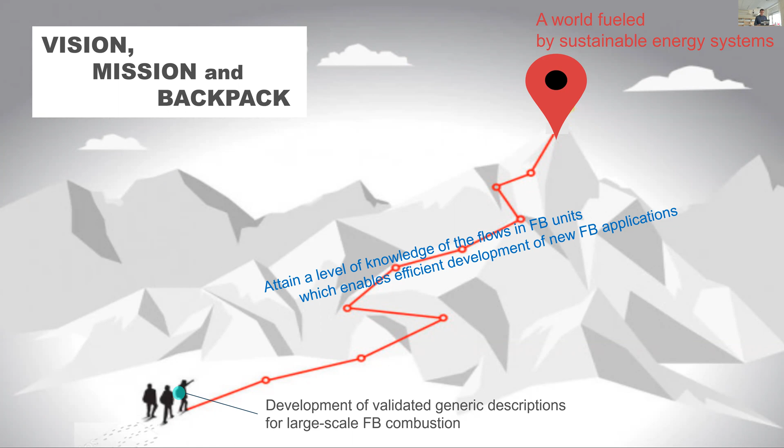So the lecture is divided into three sections. I'll first talk about the insides of fluidized beds, the physics inside the reactors and some key aspects—a bit of a crash course into fluidized bed reactors. The second section is the outsides, where these reactors can be put into different processes, how they interact, what's their role in those different processes, and what are the key question marks. Finally, I will have a section discussing the mining of new knowledge: how do we develop knowledge, how do we attain new knowledge in the field of fluidized bed technology?

So let's go with the beginning, the inside of fluidized beds. As I said, this is a crash course—the ABC of fluidized bed technology. Their function is primarily to allow gas-solid chemical reactions. Here the orthodox people will say, yes, but there are gas-solid-liquid fluidized beds. Yes, there are. And there are beds which are not intended for chemical reactions but for physical processes like dryers, heat exchangers. Yes, they are. But I would claim most of those applications are for gas-solid chemical reactions. So there are key aspects, I will walk you through these three. And finally we'll look at the two main types of fluidized beds. Yes, I will offer you some, if this allows, of course, which maybe it does not.

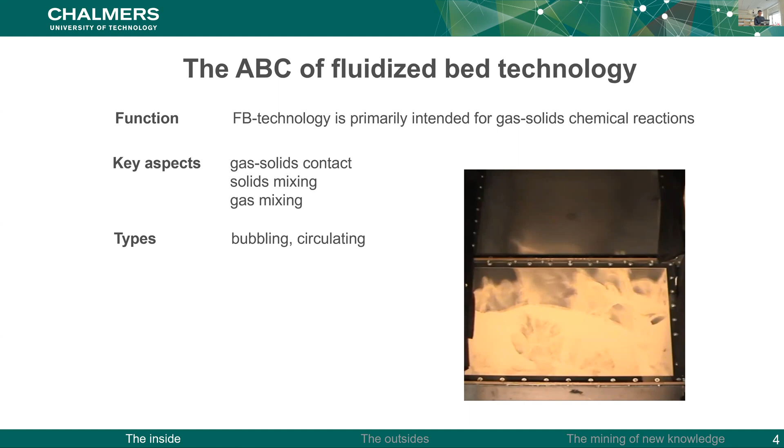No, I was thinking of sharing some video with you, but it was not possible at this time.

Let's continue. First key aspect: the gas-solids contact. One thing to keep in mind is that the gas flow is divided into several phases, and at any given time, only a tiny share of the gas is in contact with the solids.

We did a study on this, combining experiments, digital image analysis, and CFD modeling to see the streamlines of this gas. We could see how much time they spend in the emulsion with the solids, how much time in the bubbles, and so on, and extract statistics and conclusions.

We found that a good way to describe it is to say the gas goes into three phases: the emulsion phase, the bubbles, and some short-cutting jets. Sometimes the bed opens itself totally, and the gas will leave without any contact with the solids. Only the gas in the emulsion will have the chance to be in contact, depending on the mass transfer.

So all in all, the share of gas that comes into contact with the solid surface depends on a lot of parameters and on these exchanges between phases. It's a quite complex question that we have looked at and will continue to look at, but there is still a question mark on how to describe this efficiently.

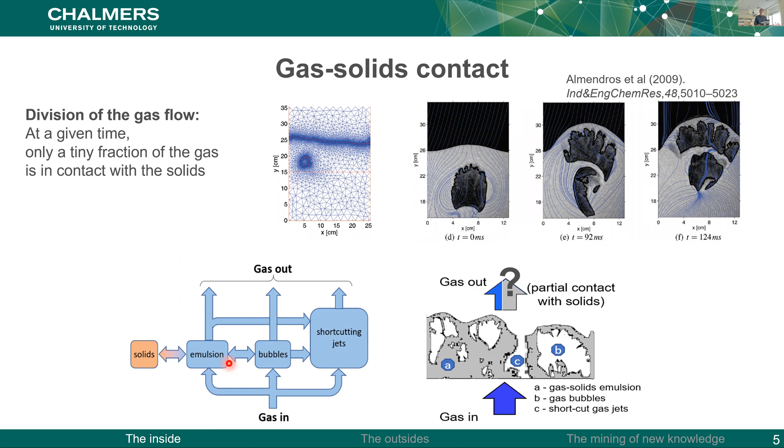Another aspect is solids mixing, compared to, for example, PC boilers or burners, where you force the reactants to meet at a certain location or enter the reactor at a certain location. Here we have the solids typically point-fed from the side of the reactor, while the gas is distributed feeding from the bottom.

So there is a challenge here in making them meet. The lateral spreading has to be fast enough to ensure good contact between gas and solids. We have been studying this too.

We can see, for example, this is from... now you will excuse me, I will fix this once and for all. Yeah, now it should work.

This is the Chalmers gasifier from the roof. We throw in some phosphorescent fuel particles and turn down the light, then do digital image analysis. This is what the lateral spreading looks like.

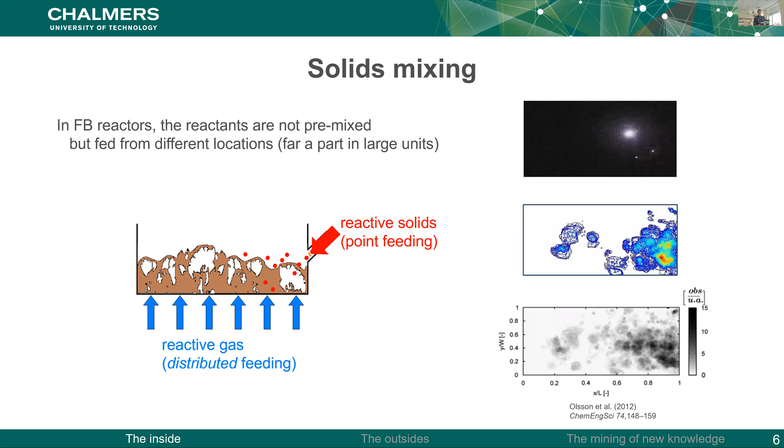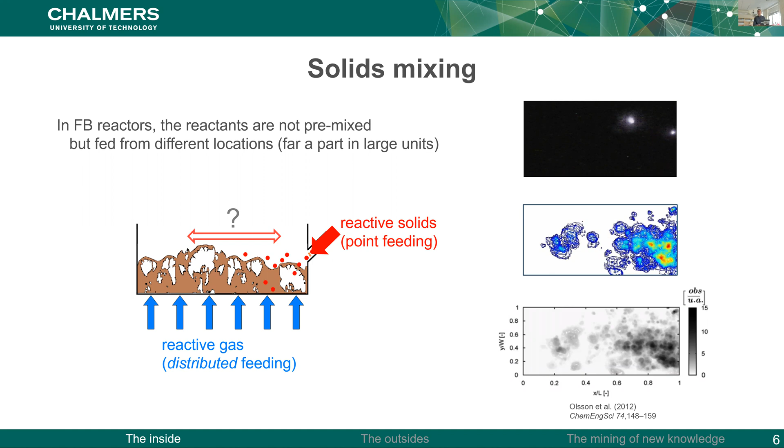As you see, there is a lot of concentration here, but on the other side there is some lack. That's the challenge we need to meet. From this we can get statistics, but we still want generic descriptions of this. This is for a specific unit at specific conditions with specific solids, and our goal is to have generic descriptions. So again, a question mark here.

Another one is gas mixing. Sometimes the gas we inject needs to react with the solids, but also with some gas that is internally produced in the reactor.

An example of this is the volatiles generated in solid fuel combustion. We have this video from Twente, and these flames you see mean that the injected air is meeting the volatiles released by the fuel particles, producing these flames.

Apparently one would say this is good, there is good contact because we see a lot of flames. But those who are alert can see, once in a while, dark smoke coming up also, which indicates that maybe the whole picture is not that perfect.

There are measurements from the Chalmers boiler here. Measuring the fluctuations between reducing and oxidizing conditions, we still see quite a presence of volatiles, and this volatile concentration decreases with height. But we see a fluctuation in the gas concentration, telling us there is also non-perfect mixing of the gas in the time domain.

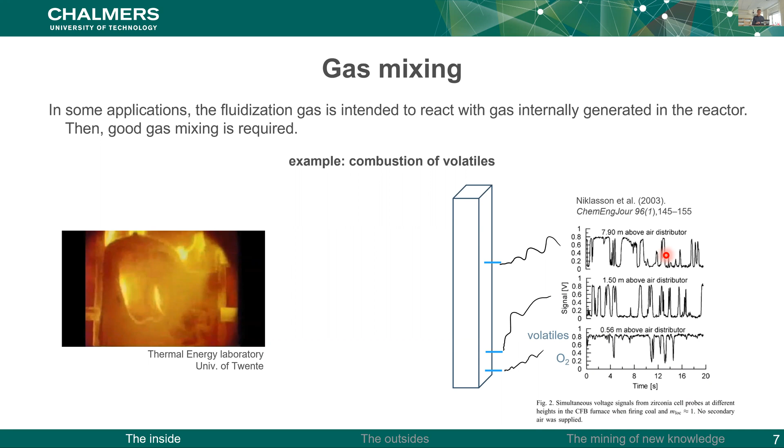Finally, another important property of fluidized beds is thermal inertia. Here's an example: if we have a tube reactor with oxygen and at some point inject hydrogen, we will have combustion and a release of heat, which will increase the temperature.

If we cool it down, the temperature decreases. If we extract the same heat that was released, it goes back to the same temperature. Now the question is what happens when we have solids in this picture, injecting not only oxygen but also a flow of solid particles, which carry much more mass than the oxygen.

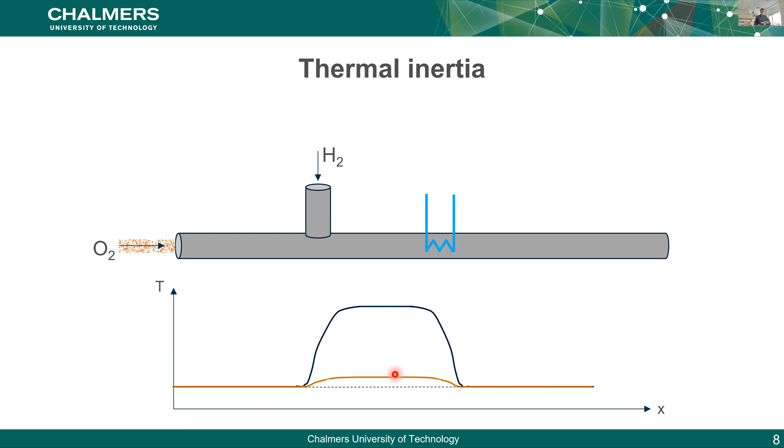This creates a thermal inertia that dampens both the temperature increase and decrease. This is a known property of fluidized beds, where there is a lot of solids mixing and solids flow, so you have rather homogeneous temperature fields.

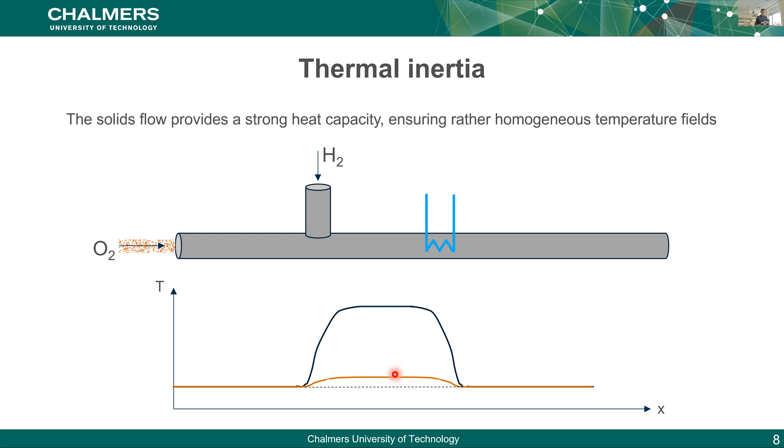Finally, we come to the different types of fluidized bed units. If we start with the bubbling case, which is the typical one, we have a certain cross-section, and if we want to increase the capacity of our reactor, we do that by increasing the cross-section. We keep the same velocity, so with increased gas flow we need to increase the cross-section, and we grow until a certain critical size. This size becomes critical because of cost, performance, mixing, and so on.

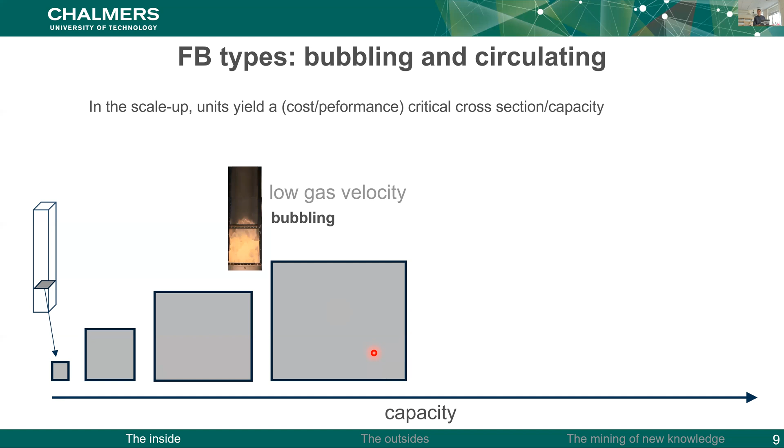At this point, if we want to continue increasing capacity and put more gas flow in, but we cannot increase the cross-section further, then we go down in size. Going down but increasing the gas flow makes the solids start to circulate—the gas flow is high enough to start dragging up the solids. This means we need a system to recirculate them, and here we have the circulating fluidized bed.

If we then keep scaling up, we again come to larger sizes, of course. But this is the main background to why we have these two different types of units.

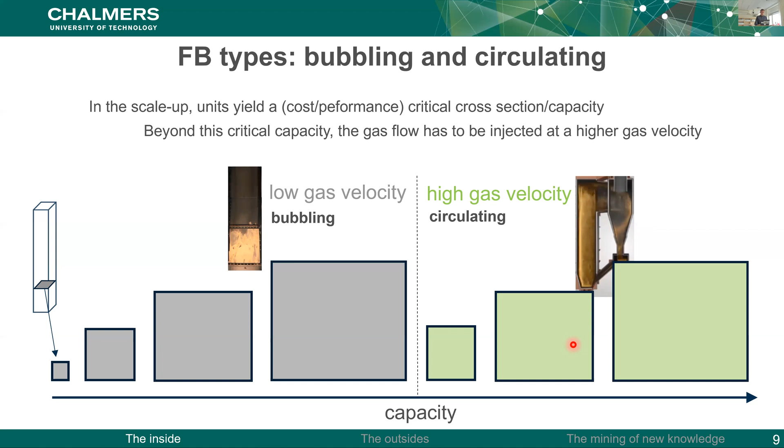Finally, this was the first section. We have gone through the key fluidized bed fundamentals and the types of fluidized bed technology. And now I can give you this hypnotic video that you could look at for ages, I guess.

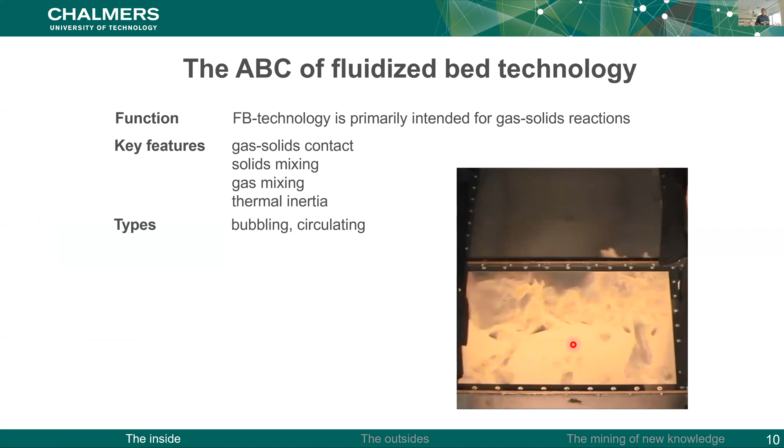This was, as I said, the first section. Now we move on to the second one, the outsides. I will begin this section by giving a bit of historical perspective.

The whole story starts 100 years ago in Germany, with the Winkler gasifier—there is a patent on that, for gasification. Gasification has been in the picture quite a lot the whole time. This is a very beneficial technology especially during embargoes and wars, when you don't have access to oil or gas—then you can produce it by gasification from solid fuels. So it has been there the whole time.

In 1937, Exxon invented the cracking process for crude oil, and since then we have had a lot of fluidized beds dedicated to this. This was the time of oil. But in the 70s came the two oil crises, and then fluidized beds turned their eyes towards coal combustion.

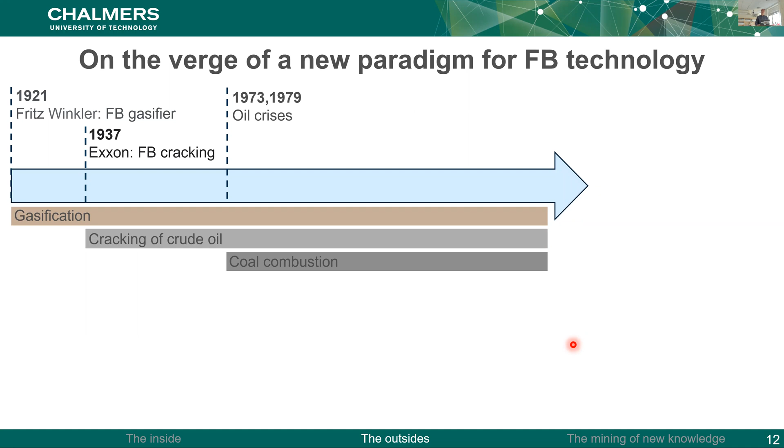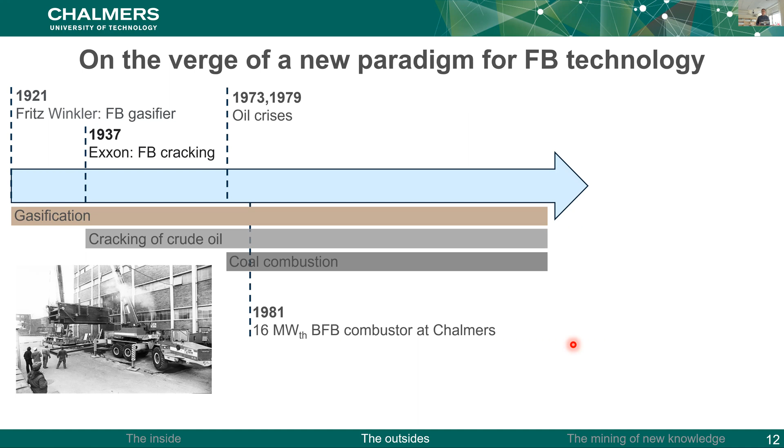At this very same time, in '81, we had our 16 megawatt BFB bubbling combustor at Chalmers installed—you can see the picture here. And in '89, we had a circulating fluidized bed installed, 12 megawatt. This unit has given a lot of joy, publications, data, and knowledge to the fluidized bed community.

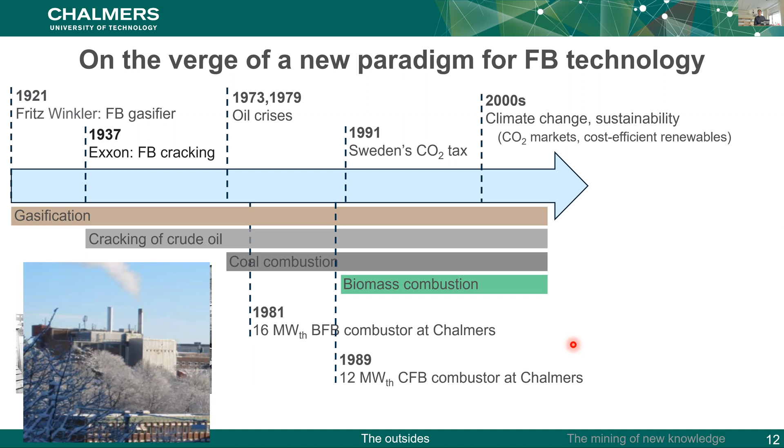In '91, we got the CO2 tax in Sweden, to combat the pollutant effects of coal, and since then we have seen a large increase in biomass combustion in fluidized beds. What we have now in this millennium is the awareness for climate change and sustainability, which has opened CO2 markets and cost-efficient renewables. And in 2007, in this new period, we had at Chalmers this 4 megawatt indirect gasifier.

What I see in the future is that some of these technologies will still be there, but we need new fluidized bed technologies that tackle carbon capture and storage, more complex bioenergy conversion, energy storage, pollution generation, and recycling.

Maybe I would say one of the most important highlights in the story of fluidization was in '98. There was this master thesis student coming to Chalmers, and he did a master thesis that still the world hasn't witnessed anything like that again.

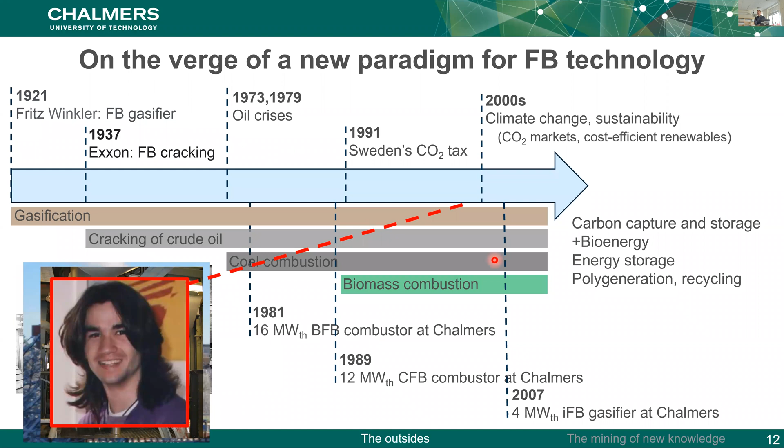I would like to focus here again: most of fluidized bed use in the energy field has been in combustion. I want to show you these statistics, from the IEA report. What we see is a clear stagnation of fluidized beds.

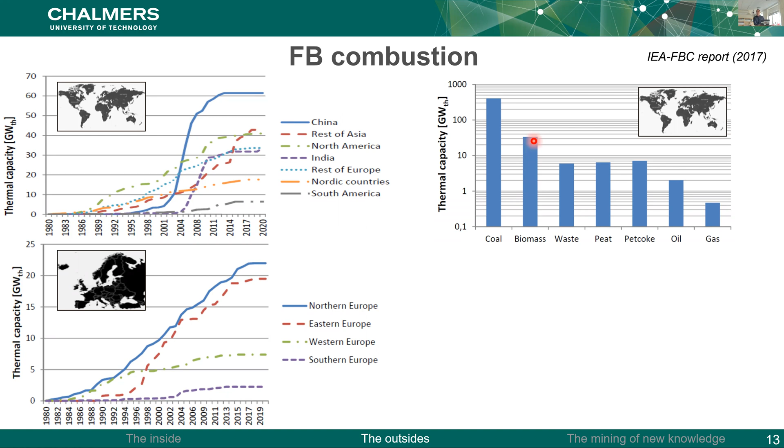And then after that, we have biomass. This is quite tricky, because this is a logarithmic scale on the y-axis, so here the factor is more than 10. We have 30 thermal gigawatts for biomass and about 400 for coal.

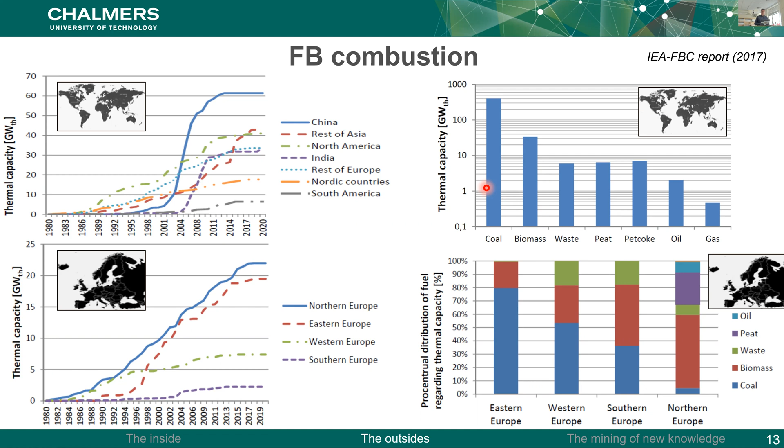If we compare this to Europe, these are global numbers, but we see big contrasts there too. In Northern Europe, most of it is renewable fuel, just a few percent anecdotic coal. But in Eastern Europe, it's 80% coal. So if you run the numbers, it's actually Canada, some of the US, and Northern Europe that stand for this biomass use mainly. The rest of the world, fluidized bed is basically a synonym with coal, and this is something you notice at conferences, which is an interesting point to keep in mind.

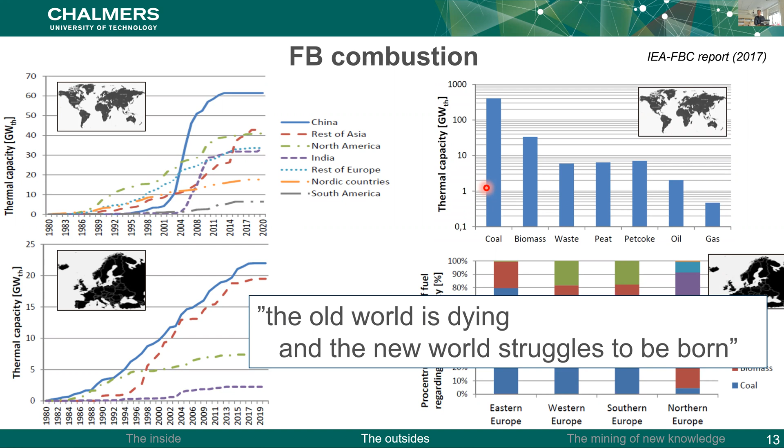I think of one of the great philosophers of last century, whose quote reads that the old world is dying and the new world struggles to be born. I think we are there somewhere. The old world is clearly maybe not dying, but at least saturating or starting to slow. But the new world is on the way, and you can see that at conferences too, where more and more paper contributions, more and more research, is devoted to these new fluidized bed technologies.

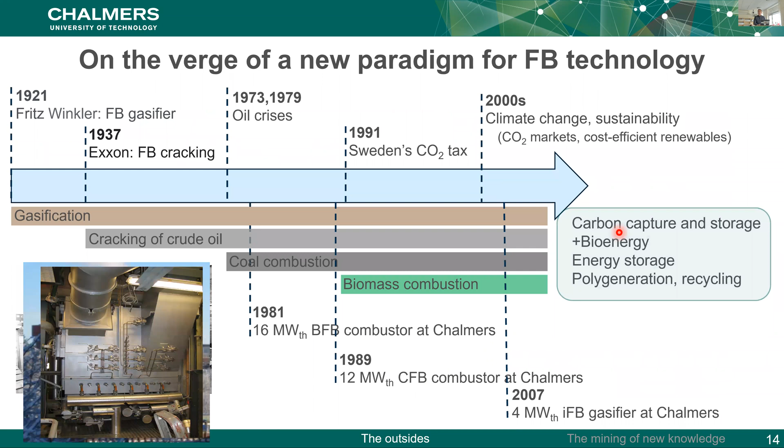So we will have a look at those. The first is thermal decomposition, which I wanted to talk about just very shortly. What we have is thermal decomposition of some feedstock, typically solid feedstock. This is endothermic, it needs heat, and this heat is provided by a flow of solids.

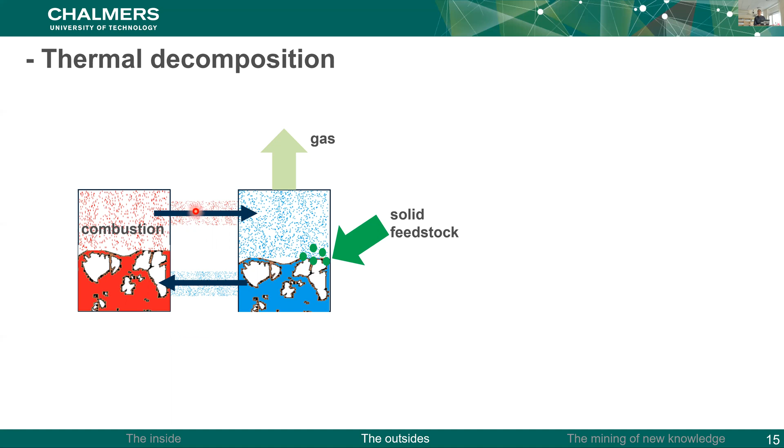Experience in this - well at Chalmers we have the fluidized bed gasifier. We've also been working now in a project together with BioShare, on a retrofit of a bubbling bed, this time not a circulating one, in Karlstad. This demonstration plant will be built next summer.

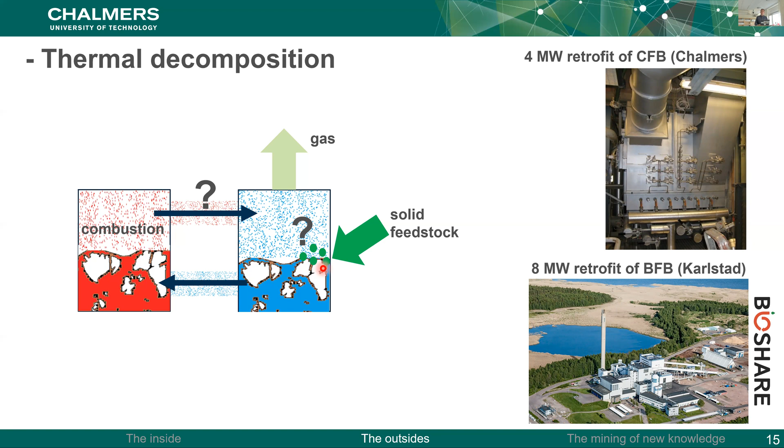Question marks here, yes. How can we ensure a high enough circulation so that it can sustain these reactions? And how will this feedstock behave inside of it - how will it mix? Because depending on how it mixes, it will experience different heat and mass transfer rates.

The second type of technologies are carbon capture. We have oxyfuel, where you feed pure oxygen, and then you have a stream which after condensation gives you the CO2 capture directly. Since you inject pure oxygen, for the same capacity you should have a much smaller reactor, but still with the same power. This means you don't have enough area to extract the heat, so you do this from the circulating flow.

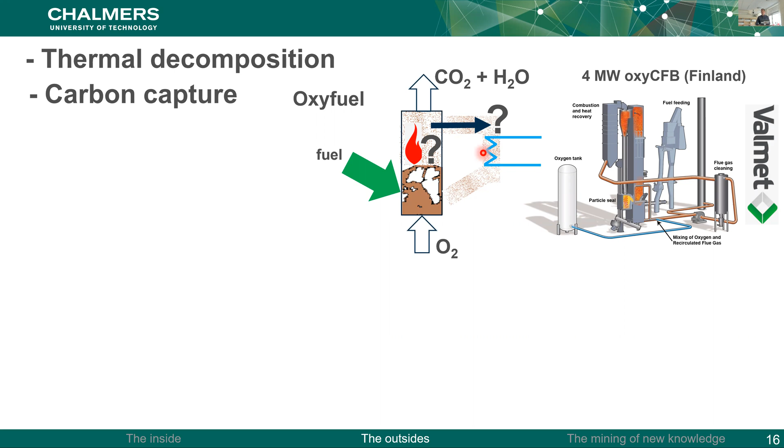This is a technology we studied with Valmet, this 4 megawatt unit, and this is the largest unit with published data on this process in literature for fluidized bed. Question marks here, yes, of course. How will combustion be affected by these high oxygen concentrations and this CO2 atmosphere? And again, can we ensure this high circulation of solids?

The other one is called second generation carbon capture, that's chemical looping. The principle is very, very fast: you circulate a metal, which captures oxygen from one reactor, the exothermic one, and brings this oxygen and heat to the other reactor, in which you gasify and combust your fuel.

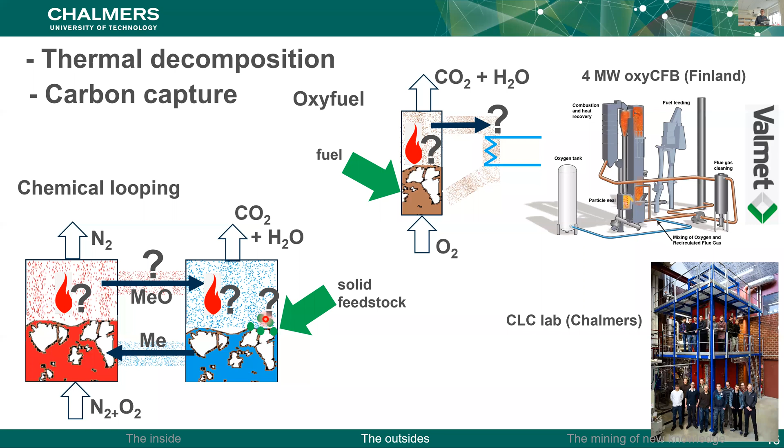Chalmers is a leader in this field - I think there is no doubt about that, in terms of running hours, number of papers, and so on. So I would say Chalmers has the lead in this field. And there are lots of question marks: can we ensure such good circulation as is required? What is the solids-gas contact in both reactors? How will the fuel mix, and so on? So again, lots of questions, and many times the same questions across the different applications.

Finally, I wanted to give a short insight into the energy storage field. Here what we see is a process with intermittent input of energy - this can be concentrated solar power, or this can be valley price electricity. What we do is have a gas-solid reaction, which is endothermic, sustained by this energy input. Once this has occurred, we have these loaded solids at a high energy level, and we can store them at ambient temperature and transport them for their use, so that they can discharge and again produce energy, even electricity, because this releases at a very high temperature whenever we need it.

So we've been looking at this also. Again, many questions.

Is the solids mixing good enough at large scale to ensure that they can welcome, so to say, all this heat? How is the gas-solids contact is another big question, but new questions particular to these applications is the transient aspect. Here we have intermittent inputs and outputs with strong variations with time. How will a fluidized bed reactor or system deal with this? And of course, the cost.

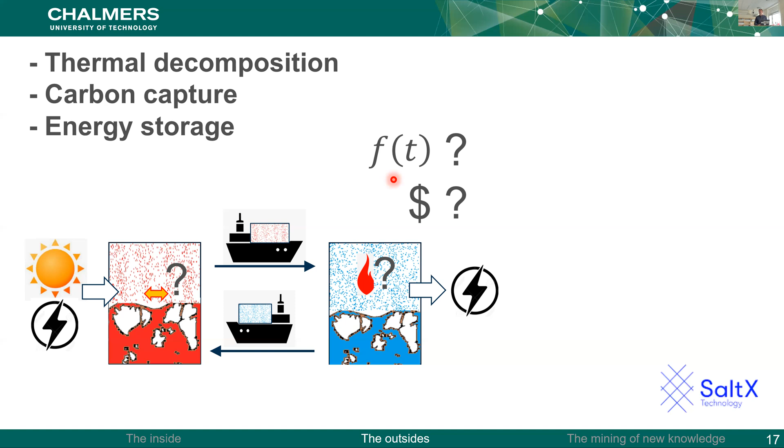There is not much in literature about this. So we did some study looking at the break-even electricity selling price for different sizes and then different assumptions on what would be the carbon capture income, because you can combine this with carbon capture if you do this with calcium looping, for example. We are collaborating in this with SaltX company, a Swedish company.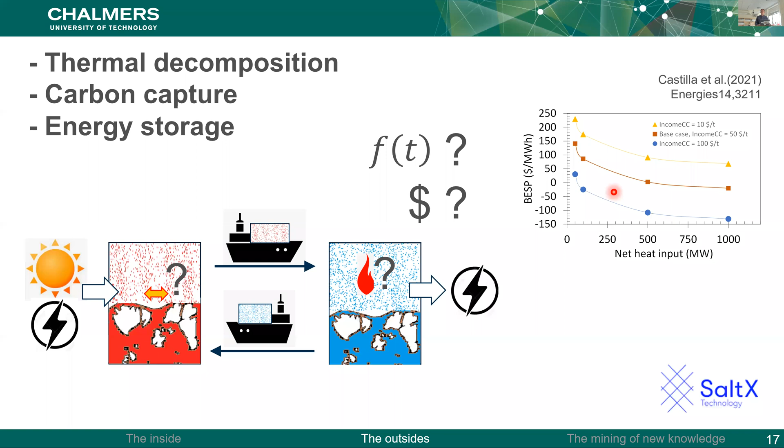And this was, in short, the outsides. So now we'll dive into the mining of knowledge, of new knowledge, I have to say. And here we have three subsections. First, a short reflection of specific against generic knowledge and how they interplay. After that, we'll go through the modeling types, what are the principles and applications of the different modeling types. And finally, a short update on new experimental techniques that we are developing here at Chalmers.

As I said, we start with the discussion or reflection on particular findings against generic knowledge. So we have this series of FB technologies that are mature, some of them are under development. But the thing is that each of them has its own characteristics. We have this figure exemplifying this for major technologies.

So we have fluidized bed combustion. This is a mid-sized combustor, 200 megawatts, as you see here. This is the size, about 40 meters tall. This is the Chalmers combustor, 12 megawatts. So you see the difference in size. And then we compare this to a crude oil cracker, a catalytic cracker. And again, you see it's very, very tall, but very, very narrow also.

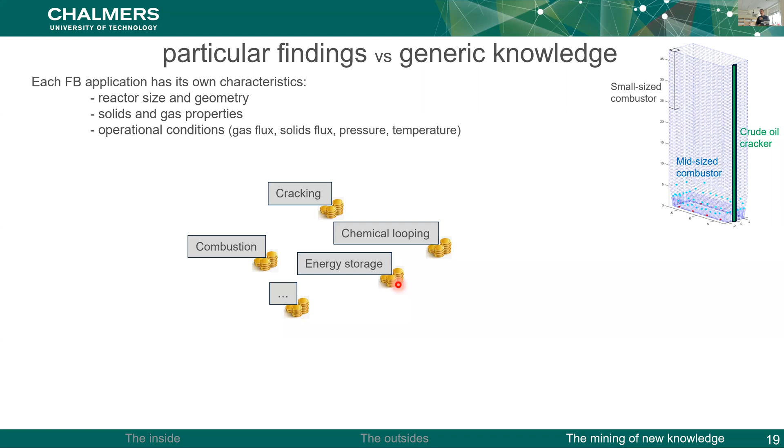And then we can imagine the different fluidized bed applications. And all of them have some assigned funding, can be industry, can be public agencies, but actors which are interested in developing this. And then the question is, can we find descriptions for all of them together? So can we describe the mass, momentum and heat flows for all of them? The answer I would say is, yes, these exist, but these theoretical generic formulations are not affordable with today's computers. And I don't think they will be, at least until I retire.

And that's what worries me the most. What we have done, when I talk about my backpack in the beginning, is this. I've been developing descriptions for combustion. And then the question is, can we find or can we extend these descriptions so that they are not particular to this application? Can we extend them so that they also could describe energy storage, for example, or chemical looping, for example? What is needed for that?

I think this is a very important topic, and I see many times people trying to use correlations from one application to another and so on. And I think caution should be taken.

Just a few punchlines I want to give about this: direct knowledge transfer between applications is seldom appropriate. It should not be done without being sure of it. Different applications mean a wider scope. This means that if we are able to find formulations which describe several applications at the same time, then the validity is much stronger. It is much more likely that they will also be able to describe new applications. So it's good to have a wide scope when you develop applications and descriptions.

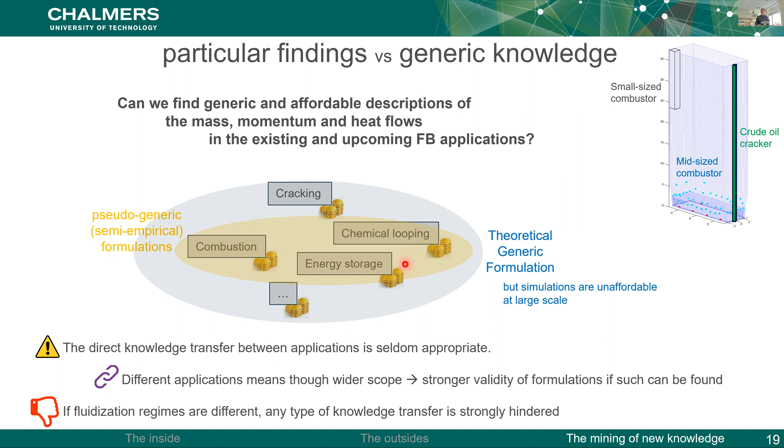I will give an example of this generalization of findings. We have here the entrainment of solids from the bottom region of a CFB, and this has been the holy grail, or one of them, in this technology for a long time. The literature is full of different correlations and studies, experimental studies also. But I would say most of them are unit specific. There are not many who look at different units with different sizes and so on.

And the ones that look at different units, they look at the same type of solids or the same temperature. So what we did was to have different units, very, very different in size. Some of them were cold, some at high temperature, about 900 Celsius, and then very different solids, again, in size and density. And we did these experiments and tried to make sense of it all.

What we found at first sight is when you plot it, it looks like this. You would like to correlate the y-axis to the x-axis, and we couldn't make any sense of it. But looking at the theory and reading, we found that if you express it in the appropriate dimensionless numbers, you could find a good formulation for this. And we are very happy with this.

But again, this is not a generic formulation for any fluidized bed. There is some limitation on this scope. In this case, it's non-slugging B-solids. So there is always this price to pay, that there is always some limitation when you use this kind of approach. Of course, this is only one example, but there are many more.

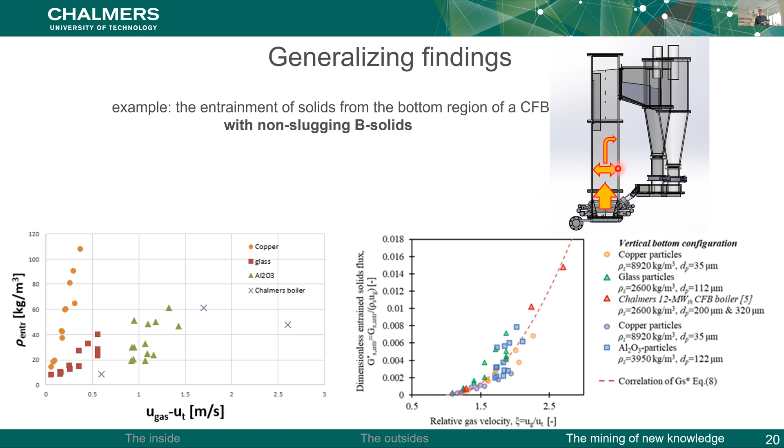What is the dispersion? What is the transfer to the walls and so on that we need to look at? So next in the queue is modeling types.

I will start with the modeling in industry and how this has worked through the years. This was very interesting because talking to the industry, it has been an incremental development of the technology. You build a bit different and see if it's right or wrong. If it's wrong, you don't do it again and you try something else, so to say. And this is a development, but it goes rather slow.

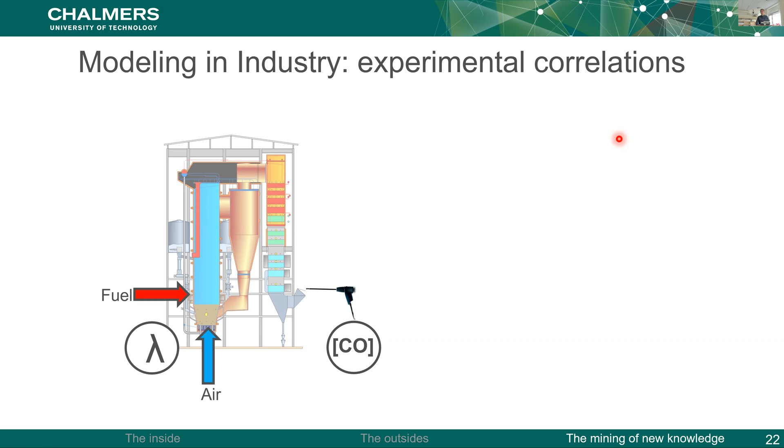So when you start doing some kind of models in industry, it most often looks like this: you have your goal parameter, could be, for example, emissions of CO. And you correlate it to some parameters, some variables. This could be the airflow and fuel flow, or the ratio between these, lambda. You can do that, and then you can find a correlation for this, and use this correlation for boilers, new boilers that you want to design.

Until someday, someone tells you that, no, I need a higher boiler, a taller boiler. Well, would you then rely on this correlation? Probably not, because this change in height will represent a change in the residence time of the CO. So then typically what you do is a new set of measurement campaigns, and then you increase your correlation to a 2D correlation, correlating to both lambda and the height.

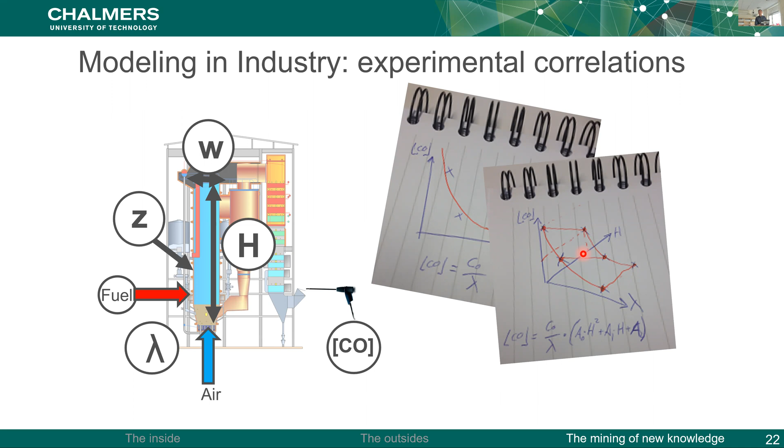And then you increase your data bank. Good, we're good with that. What happens? Well, as the technology develops, more and more variables are added to this. Different types of fuel, for example, the width of the unit, the secondary air, at what height it is injected, the temperature, and so on. And in the end, the number of inputs has increased so much that you need enormous data banks in order to cover all the possibilities, so to say.

Another problem with this is that it's uncertain in the extrapolations. It is rather fine to interpolate, but when you do the upscaling of a process, you are extrapolating. And then it's a bit of a shaky approach. That's why you don't dare taking big steps, typically.

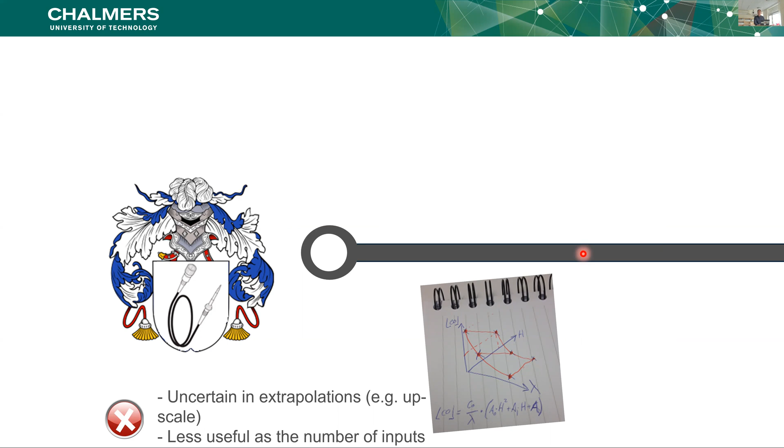Okay, this is for the cons, but these correlations are good because they only take a few seconds or less to run in a computer. And they typically are descriptions which are a black box, zero-dimensional, and steady state, so no time or space resolution. It's how it looks in industry, how it has looked for many years. I will talk about this later.

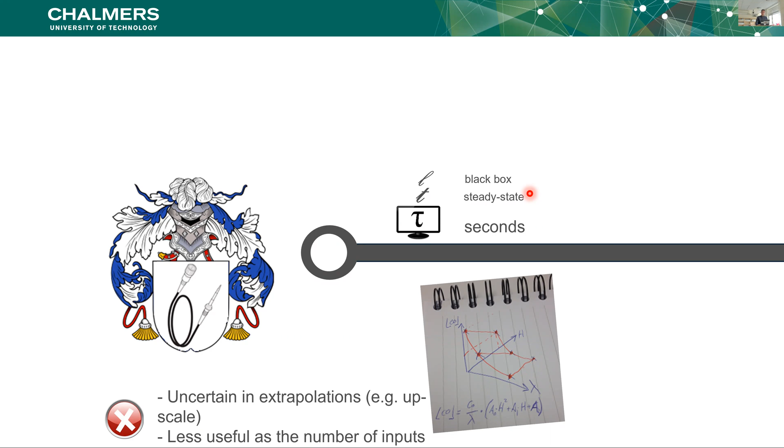On the other end of the scale, we have the modeling in academia, and that's based on theoretical expressions, conservation equations. And here I will just have a crash course into discrete or continuum. If you work late at Chalmers, now when autumn is coming, you will see these birds coming, incredible amounts of them, and flying in a very spectacular way, if you ask me.

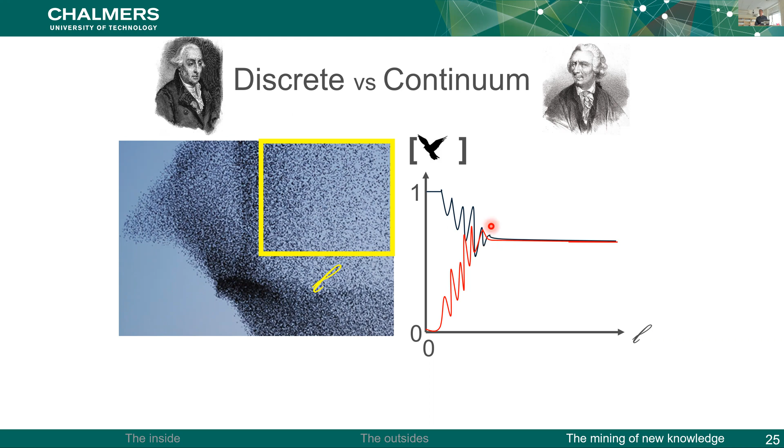I should have a prize for the right answer. Well, there are two answers, but the two of them have something in common. We start here when L is large. As we shrink it, we don't notice any big changes—there are some changes, but hardly noticeable, because whenever one bird gets out of the domain, it doesn't impact that much. But there will come some point in which a bird in or out makes a big impact, and then we see these big variations. And finally, as L tends to 0, you will zoom in into a bird, and then the value becomes 1, or into the air, and then the value becomes 0.

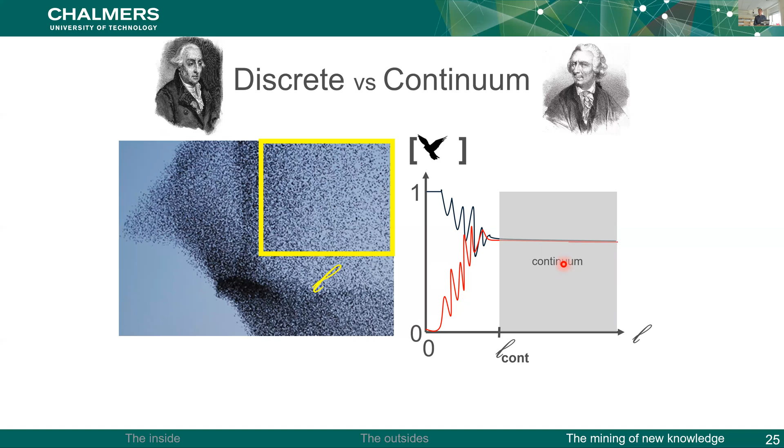But this tells us that there is something which can be called a continuum. So for defining a continuum, for working with the concept of continuum, you need a certain threshold size to be above, otherwise the definition of continuum is violated. And when you have a continuum defined, funny things appear, like you have gas molecules, which are discrete elements, but when they are treated as a continuum, new properties appear, and that's pressure, for example, or viscosity, to name a few.

And the same happens with the solid particles in a fluidized bed. There is the solids pressure, and then there is the solids viscosity also.

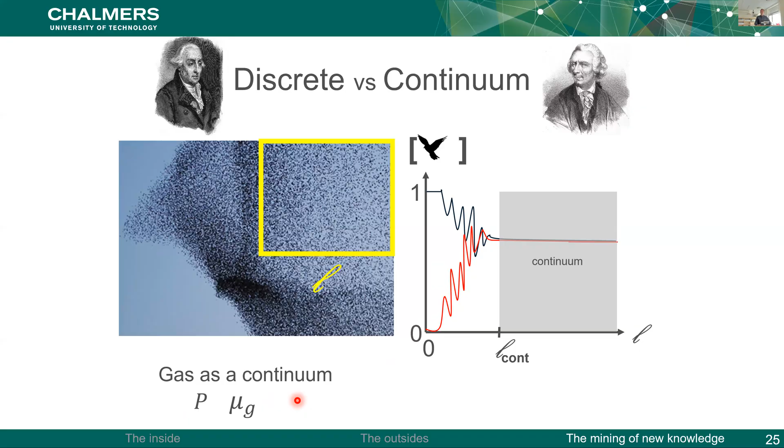Then coming back to the modeling in academia, we have the two types where you describe the solids by modeling each of the particles. Sometimes people don't trust me, my friends, when I tell them that there are people, or computers rather, doing this. But yes, this is possible. It takes time, of course.

And then there are models describing the particulate phase as a continuum. So this is the Eulerian-Eulerian modeling. Recently, in the last decade or so, there has been some kind of an intermediate approach called particle in cell, in which we have clusters of solids which are considered as elements, but the cluster itself is a continuum. So that is also a new interesting approach.

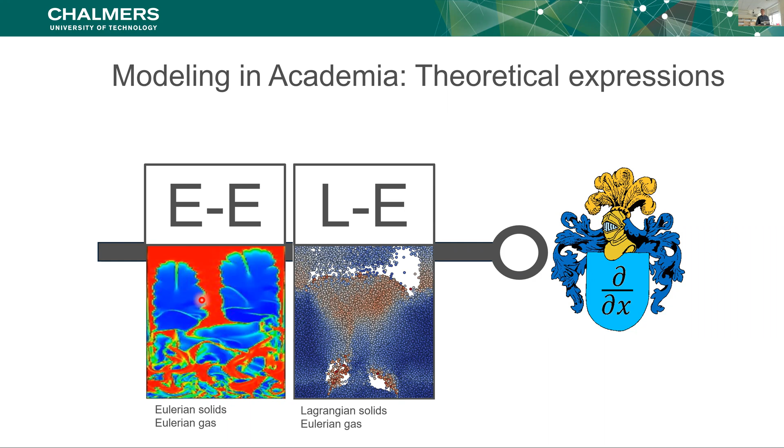Anyway, coming back to resolutions, of course, the more to the right we go, the more resolved we are in length, in space and time, but the more time it takes on a computer to solve these problems. So this is the whole picture. And to this picture,

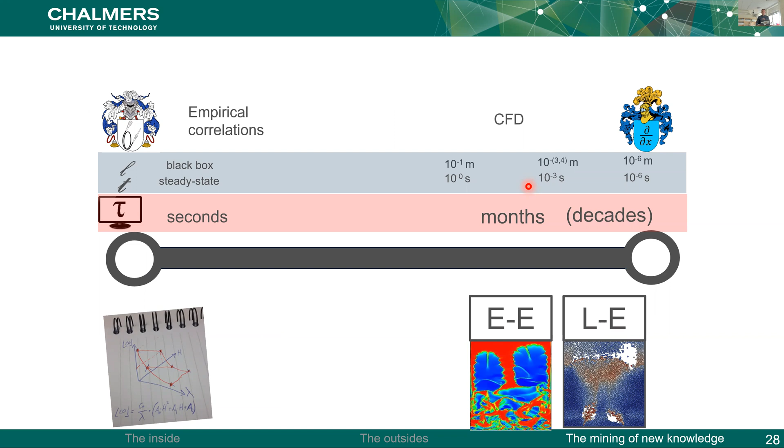in the last 20 years or so, we have added a new approach to modeling in which the momentum balances are dropped. These are the ones that take most of the uncertainty, so to say, in the formulations and of the calculation time. So if we drop the momentum balances and limit ourselves to solving the mass and energy balances, using some expressions for velocities instead, since the momentum balances are not solved, then we have something new, and this is called semi-empirical modeling. It's not empirical because we are caring about the mass and energy balances, but it's not CFD because we're not solving the momentum balances.

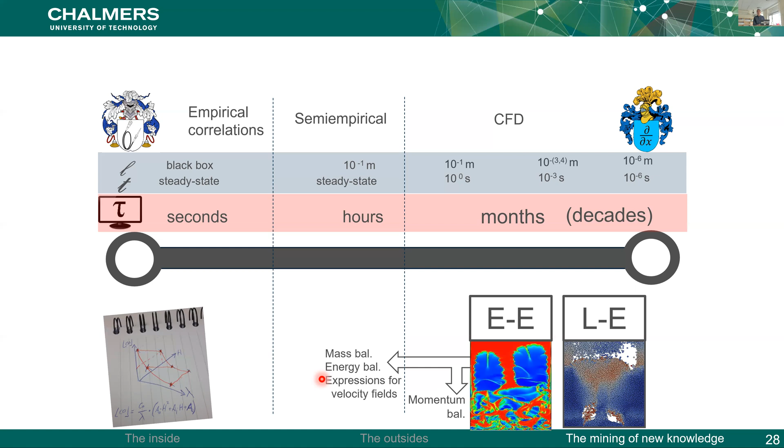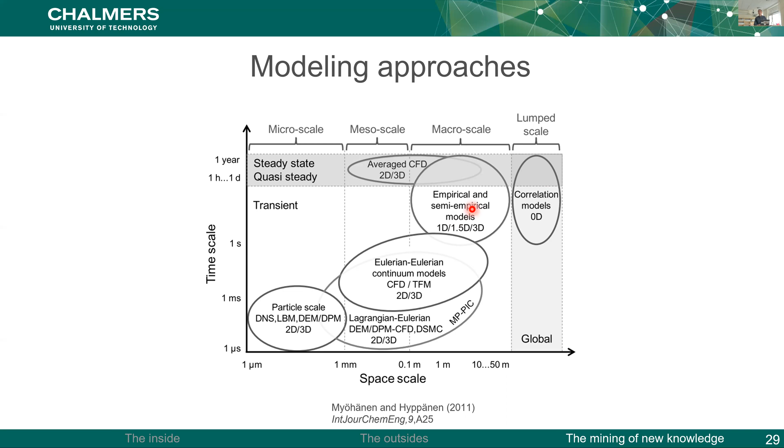This was perfectly summarized in my eyes by Myöhänen and Hyppänen in this plot. We have the space and time scale, the resolution. So here we have the highest resolutions, DNS, direct numerical simulation, being the highest of them all. And here we have those correlation models or correlation expressions, typically steady state. And of course, they go here in a diagonal, as you said. And this new type of modeling that I was telling you about, the semi-empirical, can be found here, in between CFD and empirical correlations.

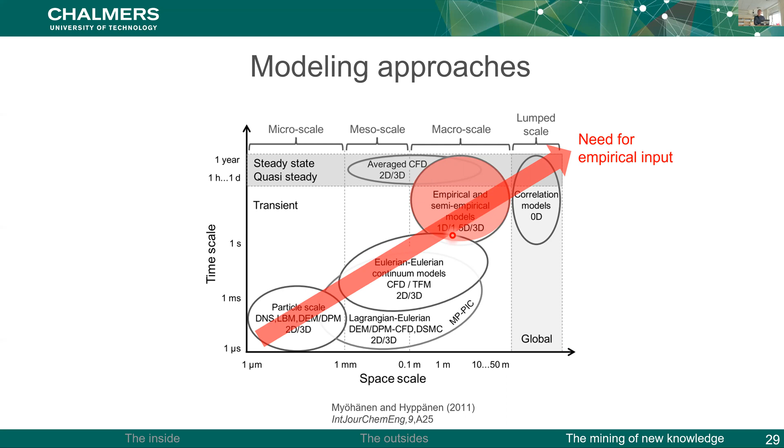We have been working with this for quite many years together with Valmet in developing biomass combustion. And this is what the model looks like, more or less. It is in the order of hundreds of thousands of cells, but this can be solved in 2 or 3 hours on a desktop computer.

And this is one of the boilers that we have worked the most with. It is based, or placed, in the US. So here we have some results for it. This is the oxygen concentration field at the height of almost 20 meters. And there was an intensive measurement campaign, 48 points. And the model gave an average error of 9%, which in the world of FB boilers is very good.

Then we have also temperature measurements. This is the model, the simulated temperature field. What you see here is that by the front wall, there are wing walls, heat extracting panels, and then you see these colder temperatures here. But in here, you have everything: the solids flow, the gas flow, the combustion, the reactions, the heat transfer, radiative, convective, and so on.

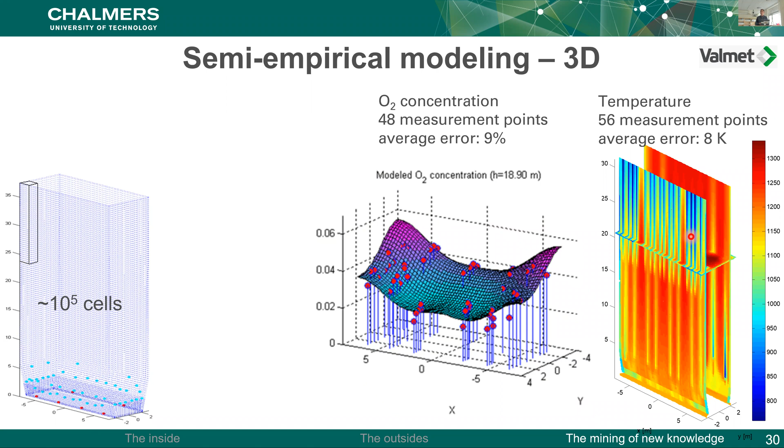Here, the average error was 8 kelvins for temperatures around 1100 kelvins. So again, we are very satisfied with the performance of the model. And of course, then we could calculate what is the heat flux to the walls for the water walls.

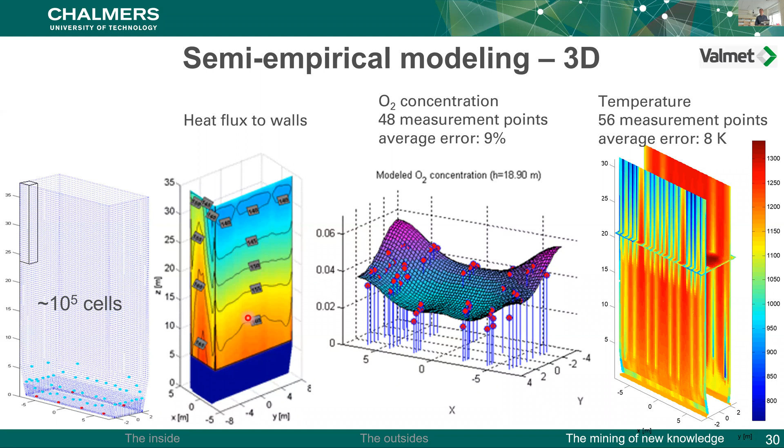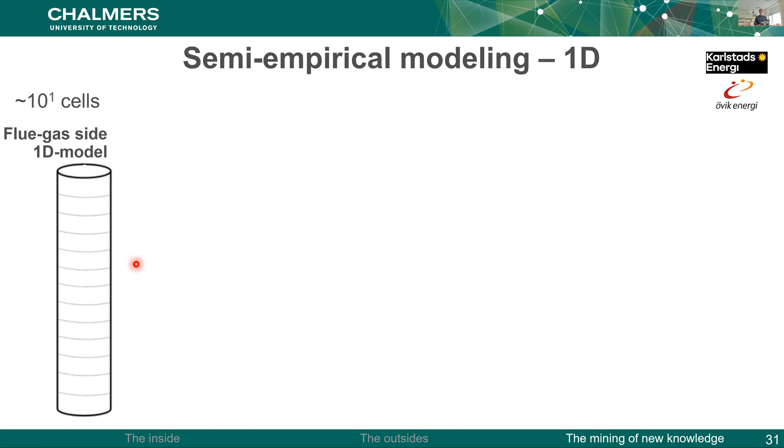This takes 2 or 3 hours to calculate the steady state. But if we use a one-dimensional modeling in the order of 10 cells, 10, 20, 30, then the calculation time gets down dramatically, of course, and then we can do funnier things, like coupling this fluidized bed reactor in a process, coupling it with the steam side in the case of a heat and power plant. This allows for transient simulations and I want to see the interplay between the two of them. What is the response time of the reactor and what is the one of the steam side?

And this has been leading to very interesting results. Typically, the assumption in literature has been that the reactor is very fast compared to the steam side, but we have seen that this is not a reasonable assumption, that you should account for both sides.

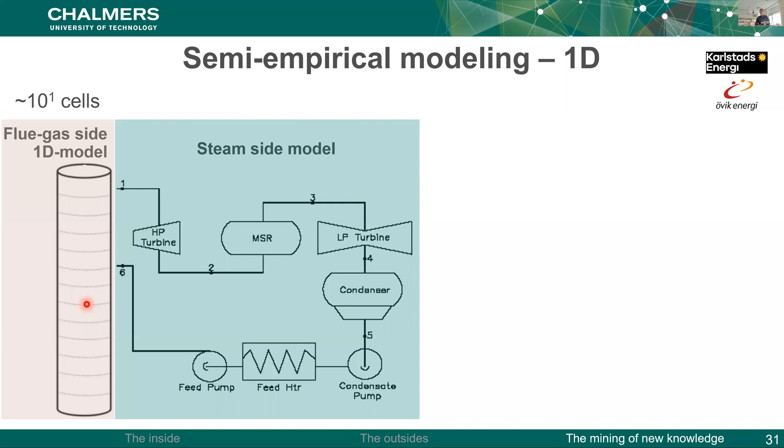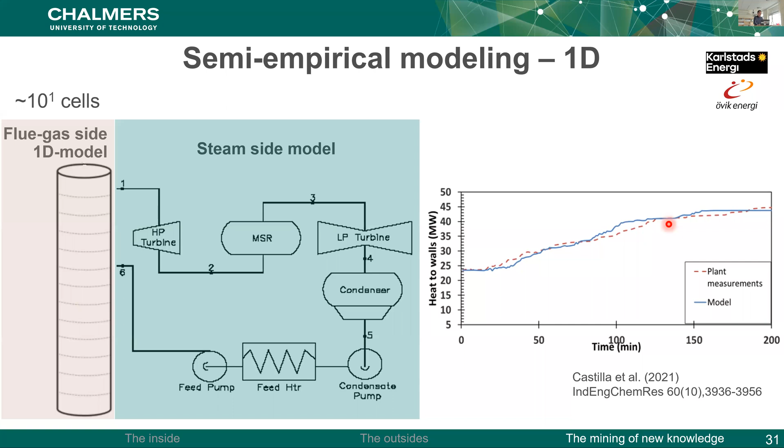Together with Karlstads Energi and Övik Energi, we have been modeling their boilers and some transients like this one, in which we change the load. This is important because in the future, heat and power plants are envisioned to be slaves, so to say, of the system and of the renewables in the system, and to be forced to change load rather fast and rather many times. Okay, this is how you do semi-empirical modeling.

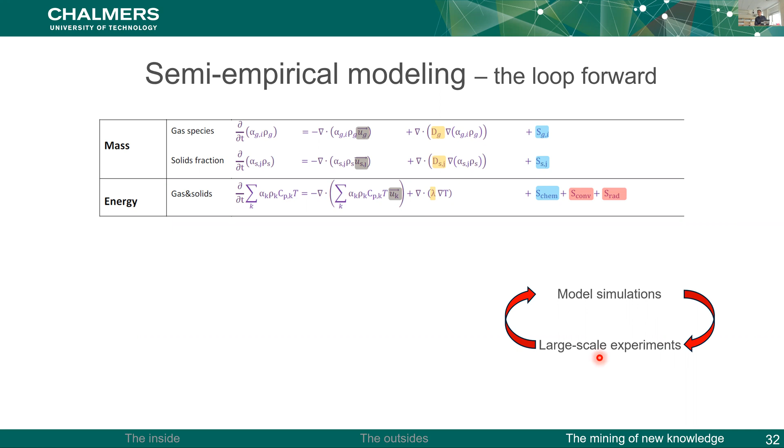I wanted to tell you finally about the loop, how we improve our models. We have model simulations and large-scale experiments. You do your simulations compared to the experiments and then find something you're not happy with. When you have identified that knowledge gap, what is creating this dissatisfaction, then with this knowledge gap, you plan targeted studies to tackle it. You formulate theoretical hypotheses until you refine them until you are happy with this. Once you are happy with this, you have a new submodel that you put in the big model and the loop restarts.

This is a very good way to improve your model, which is typically the product that you have for industry or so. But also it is a very good way to identify where the activities in research should go, because the model can tell you what is the weak link, the weak part of your knowledge, and then it can help you design your research activities or strategy. And finally, if you make these targeted studies covering a wide operational window, your model will be compared to measurements of a specific application, but your model will also become more and more generic.

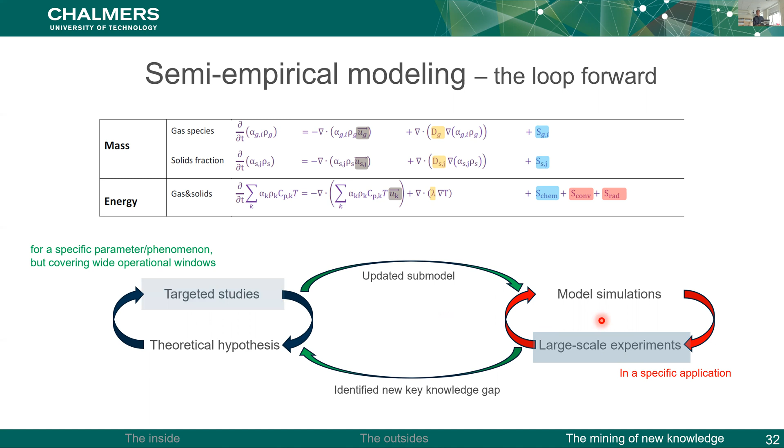And finally, I will talk about experimental techniques. I will begin with fluid dynamic scaling. This is something that we've been working on here at the division for many years, almost 3 decades, I would claim. So there is a strong tradition in this division. The whole principle is that there are scaling laws, and they consist of a set of dimensionless parameters. And if you respect them, if you keep them constant, the fluid dynamics will be preserved. This means that you can measure in another unit, and afterwards these measurements can be upscaled and tell you how the flow looks like in the hot, large-scale boiler.

We did this downscaling for a 200 megawatt boiler in Finland, a Valmet boiler, burning mainly biomass, sometimes even coal. And then with a scaling factor of 13, we built this in our lab. So we were not afraid of superstitions when we chose 13 - there was some discussion on that. But as you can see, it's quite a large piece. The original boiler is 40 meters, so the lab one is 3 meters tall. And for comparison, here you have the tallest professor we could find in our division.

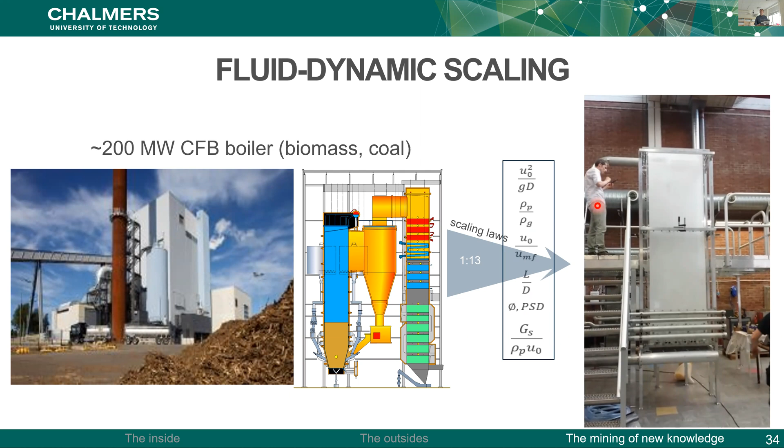So why fluid-dynamic scaling? I'd say there are a few advantages, but the main four are: increased operational flexibility. You cannot go to a large scale, utility scale fluidized bed boiler operator and tell them to do crazy things, but you can do crazy things in these fluid-dynamically downscaled units in your lab in terms of flow and so on. They allow ambient conditions, which means you can use a wider range of diagnostic tools. You can have safer experimental campaigns, and not only safer, but also cheaper ones. So a lot of advantages here.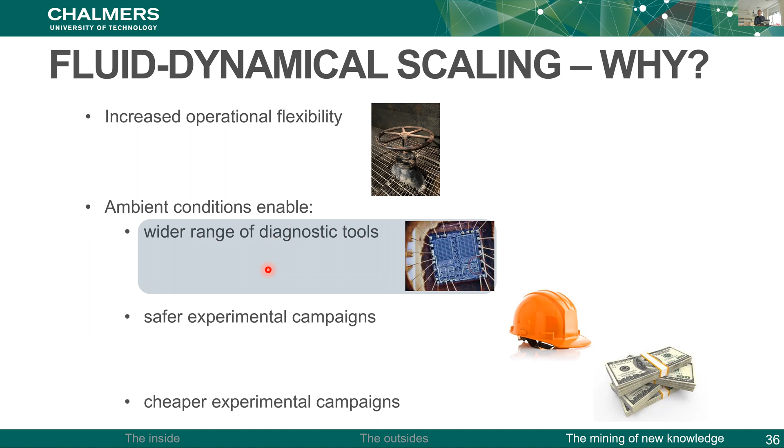I will focus on the diagnostic tools that we have used. I will show two of them. This is for studying the mixing of the fuel.

We have magnetic particle tracking, and we have this from the Chalmers gasifier, in which with a camera probe, we look at... let's see... probably like this... let's see if this works... yeah, so with a camera probe, after burning a few cameras, we managed to record the movement of the fuel.

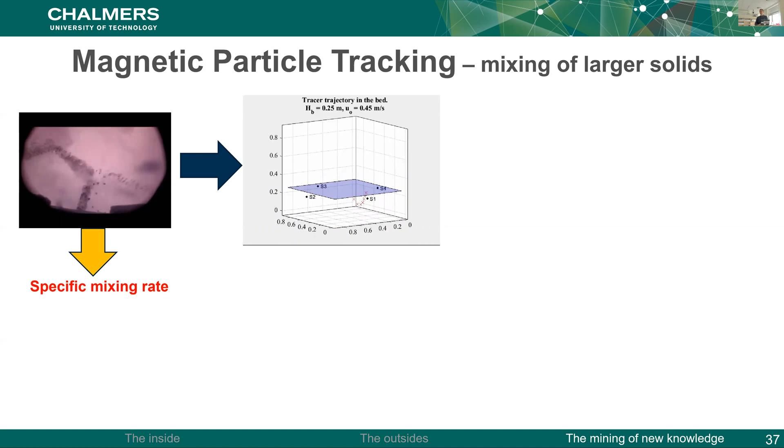Then you can do digital image analysis of this and derive or extract a specific mixing rate for this situation. Instead, with magnetic particle tracking, you have a magnet, you encapsulate it to give it the right properties to resemble fuel at scale conditions, and then you can recreate the trajectory through the magnetic fields detected. This gives you a 3D insight into the flow, which you don't have from the camera. From this, you can derive velocity fields, concentration fields, and so on, and even the viscosity of a bed, which is something you would then use in a generic formulation.

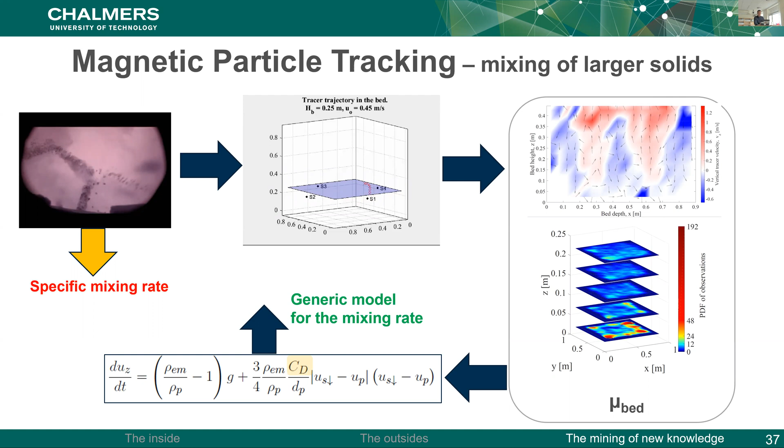This takes you a step closer to a generic model for the mixing rate. Now I have a buffer slide which I intended to walk you through if I had the time, but I don't, so I will jump it over. It's a pity. I will talk about the other technique.

How can we get good insight into the flow of fine solids? The magnetic technique I showed you is good for large fuel particles because we need a magnet to track. But what about the very, very fine solids? As I said, we are very interested in knowing how they move, how they entrain from the bottom, how they go to the wall, and so on.

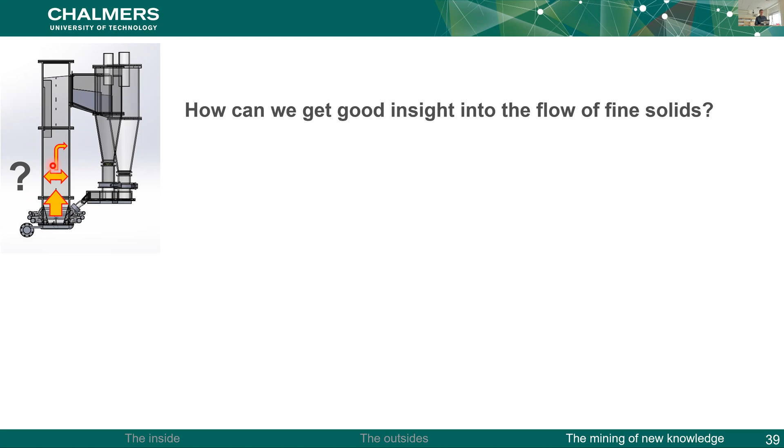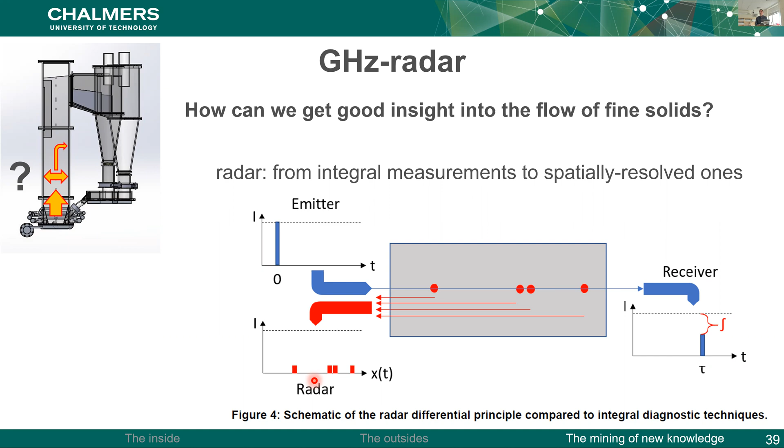We believe we have found an answer in radar. Radar represents a big change in fluidized bed diagnostics. Typically, the techniques have been based on an integral principle - this can be radioactivity, this can be electric capacitance - a signal is sent and you measure in a receiver how the signal has been absorbed along a certain path, so for each measurement you get some kind of average through that path. The radar technique instead works by the signal bouncing back. If you can have the response of all these bounces resolved with time, you know where in space these different bounces occur, so you can resolve along the path instead. It's a 1D method against an integral method, giving a new paradigm into the measurement or diagnostics of fluidized beds.

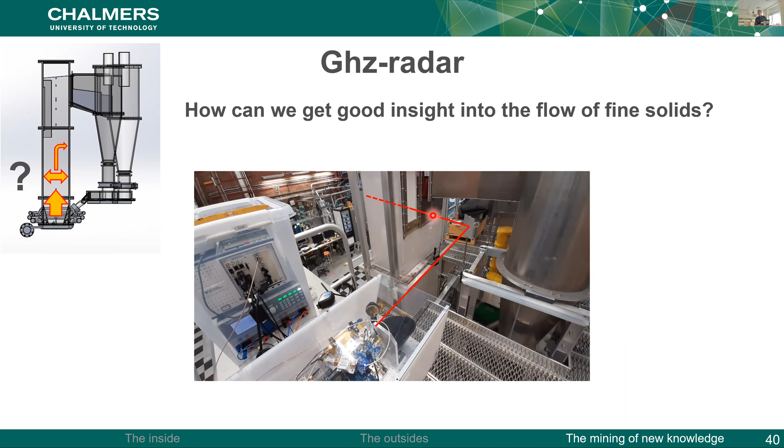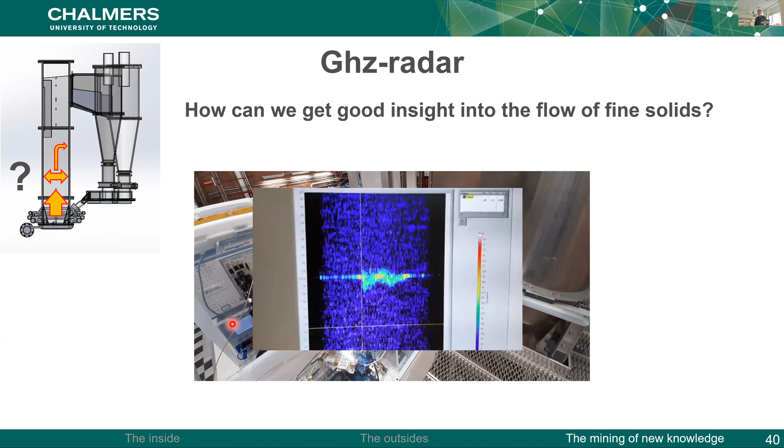Here is the setup, very fresh from the oven - I got these pictures a couple of weeks ago. The radar signal is sent into a mirror and then from the mirror into the bed, and this is how the signal looks. We haven't processed the data yet, but you can see it's resolved and it fluctuates. So we are able to resolve both in time and space the velocity field in this case, and this is extremely promising.

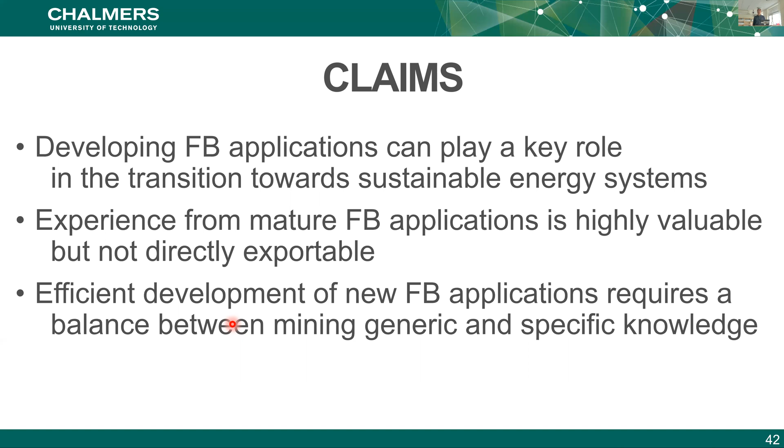I think this is mostly it. I walked you through the three sections I announced, and just some claims to be made: developing fluidized bed applications can play a key role in the transition towards sustainable energy systems. Experience from mature applications is valuable but not directly exportable - one should be careful with this. Finally, efficient development of new applications requires balance between mining of generic and specific knowledge.